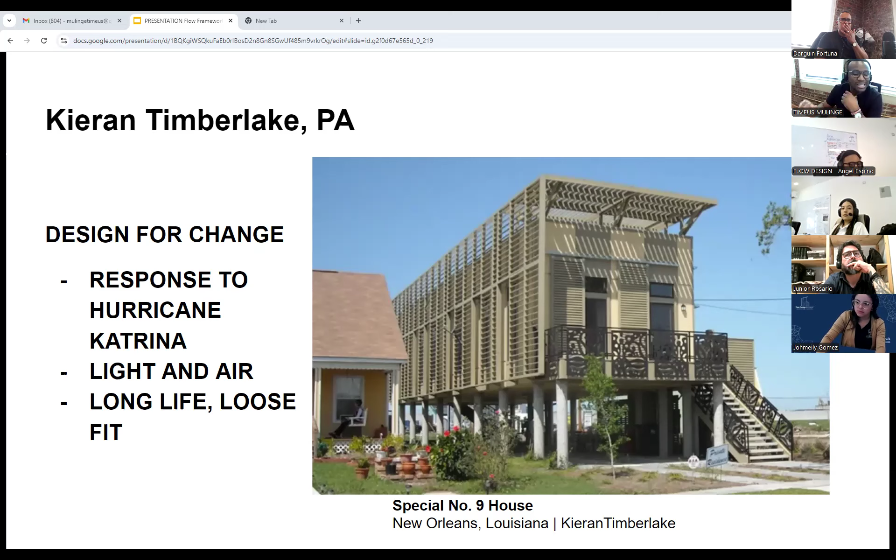This is a project that I used as a precedent, and I reached out to the partners and worked with them for my senior thesis, which explored the spatial potential in informal settlements in the case of Kibera, Kenya, Kibera being one of the largest informal settlements in Africa.

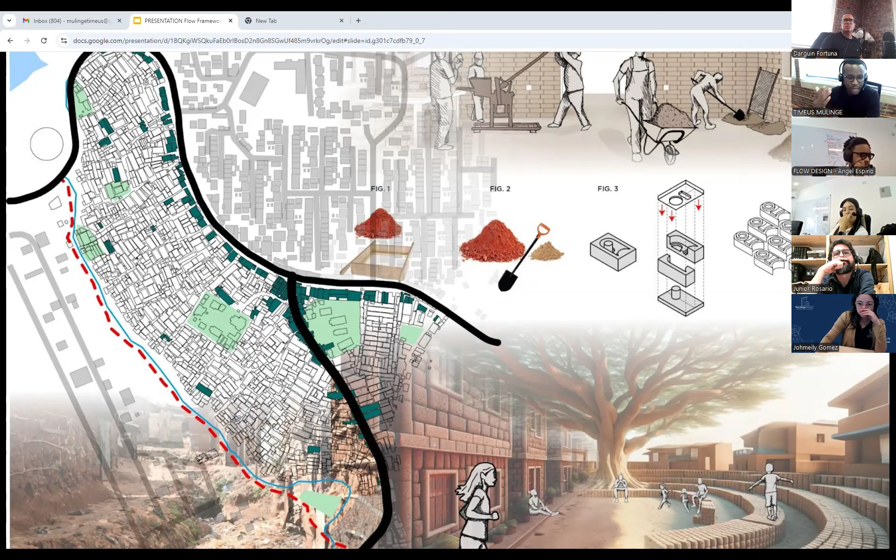For this project, I designed and obtained a provisional patent for a brick design which would become the fabric of the new community of the Kibera slums once it would be fully rehabilitated. The design of the interlocking bricks, using earth as the primary material, enables residents to build faster, cheaper, and better. The proposal tackled collaborative design with the residents, well-being, the economy and self-sustenance of the community, bridging social boundaries, and so much more.

As you can see from this GIF, this is the mold that would be used to create the bricks. When assembled, the brick wall is a structure in itself.

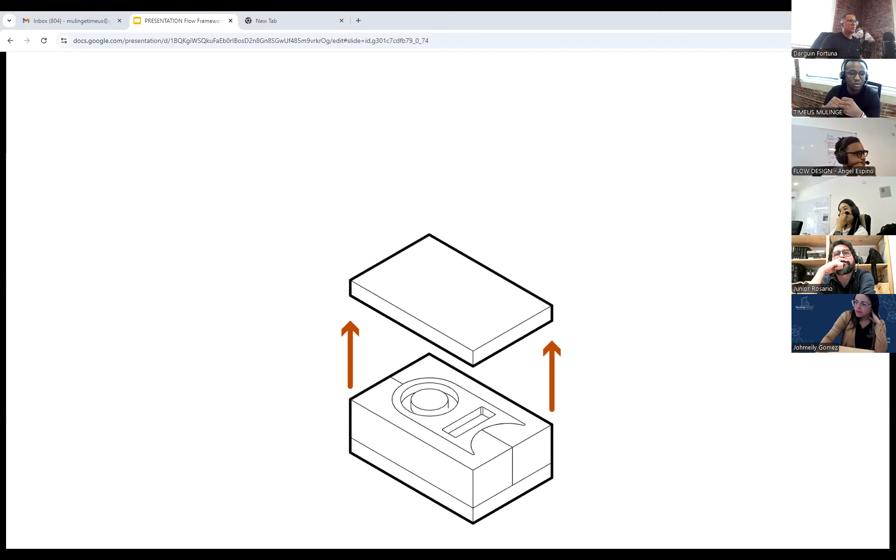However, its form allows for structural reinforcement through the openings if needed, and it's a mortar-free form of construction with a chase system built into the design of the brick that allows for the running of plumbing and wiring through the brick.

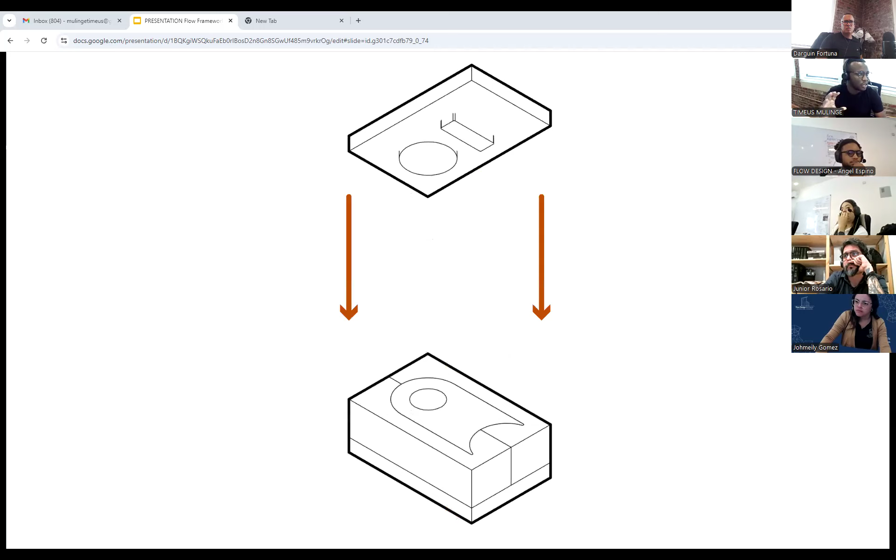This design functions better in equatorial spaces, for example in Kibera, Kenya, where you don't have issues of insulation, but the brick could also be modified to fit any other setting that you would expect it to fill.

The brick variations: the brick form is versatile and allows for a wide range of variations. One single mold can generate about 9 variations of the brick that facilitate different types of designs and movements, from staircases to Nubian domes to pavers and many more.

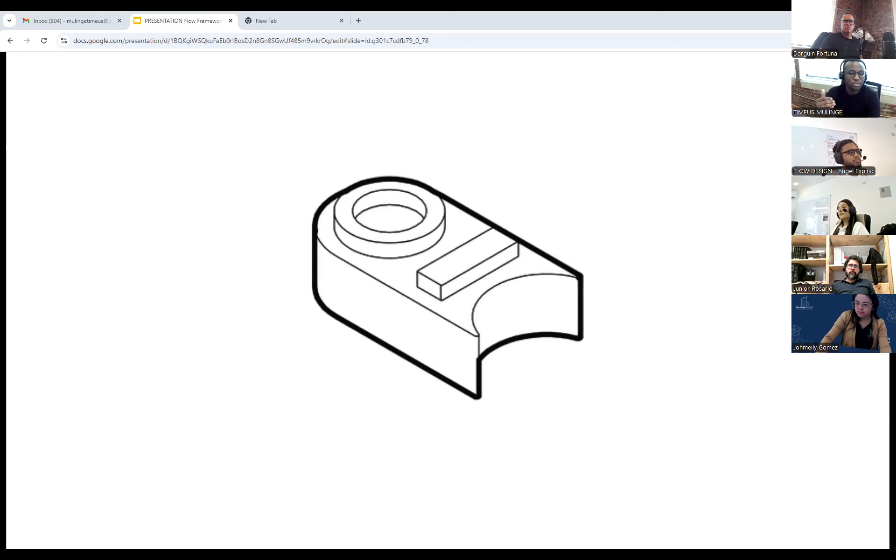At the larger village scale, the brick is used to build houses and spaces where collaboration takes place. The success of this project is tied back to the brick, a product, a transformative tool that becomes currency, reimagining the fabric of Kianda village, which was my test subject.

And it introduces spatial efficiency, breathability, enhances stability, productivity, and creativity, while empowering people to attain economical and familial prosperity.

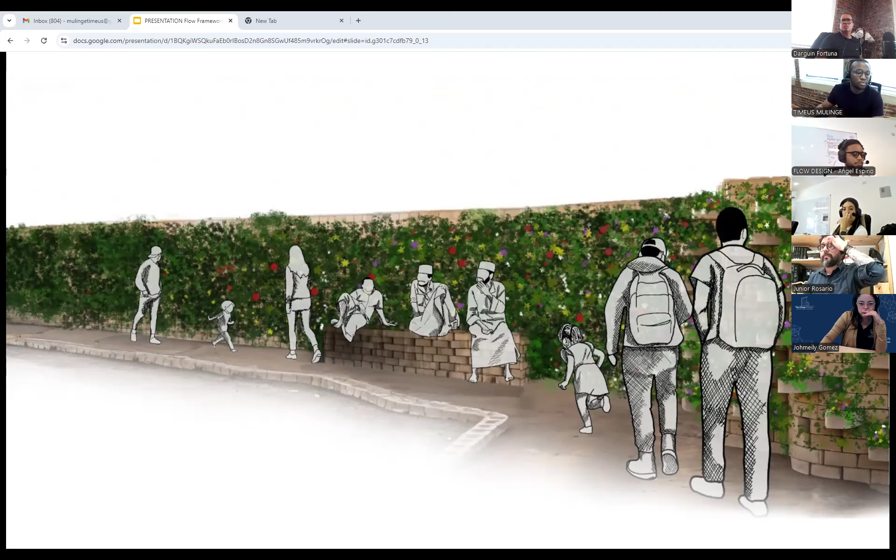This is one of the renderings from the housing methods that I did. The spaces that will be created will be used to open more educational spaces, create spaces for expression and creativity, which is a very common theme in the Kibera slums, and it will facilitate cultural and economic exchange.

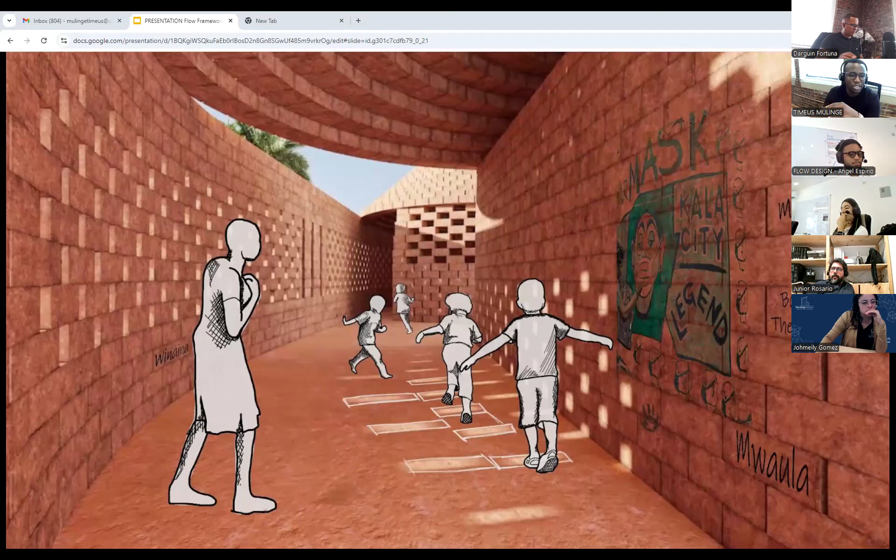This is another rendering. Currently, the senior thesis project is an ongoing conversation. The design is being perfected by a team of professors from Wentworth and professionals, and also some mentors. Implementation conversations are underway with a number of sponsors, leaders, and organizations back in Kenya.

The goal is for the patent of the brick eventually, and all other forms of ownership, to be transferred back to the people of Kianda upon completion.

By enabling active participation and giving them the tools, historical inequities stemming from colonialism are addressed. The brick assumes personal significance, becoming an emblem of legacy and ownership, which offers a direct pathway to self-determination, free from the cycle of colonization and westernization.

So I put this project here because it goes past architectural response and speaks into how architecture can be used to influence laws and create a system where we can design better communities in the disparities that are present.

Switching from that is a topic within my interest, which is design for equitable communities. As designers, creating and building equitable communities is essential in our work. The challenges around equity appear in both public and private sectors and require strategic approaches to tackle them.

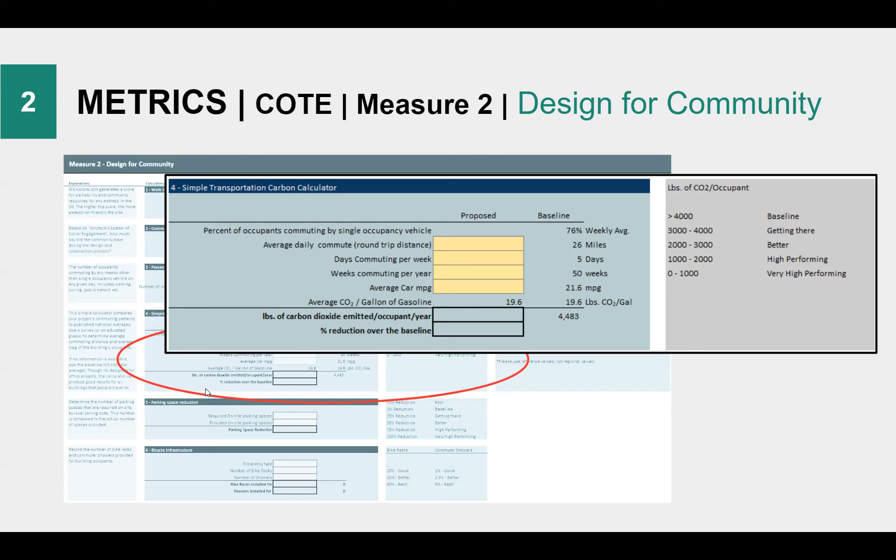It's us thinking about all of this so that every time I'm looking at a project at the very beginning - that's why we highlighted it in the contract - I look at it and say, oh, this person will probably need X, Y, and Z also. So when we do our design options, we do a basic one, and then another option that adds these things more intentionally. They talk about each one of these items and a metric for all of them in this presentation.

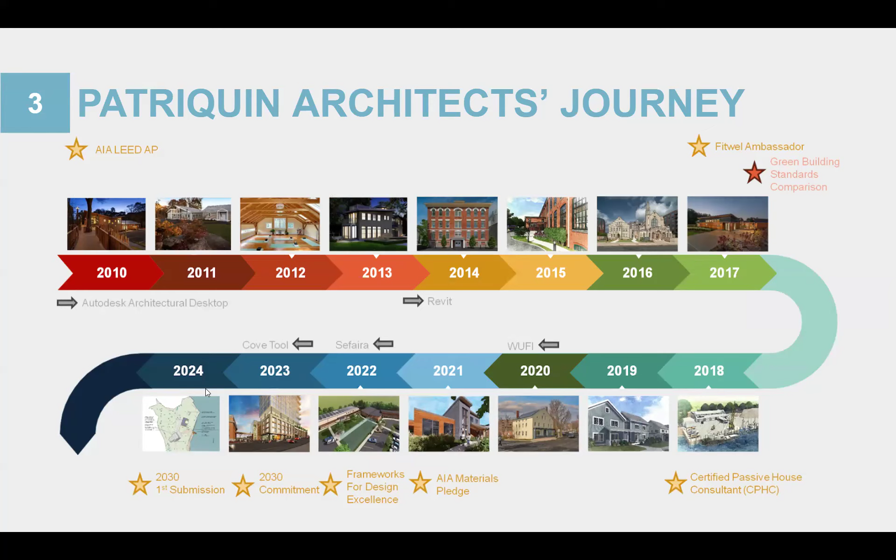Very simple, we don't have to go too crazy on all of them, just understand what they are, what they mean, what's discovery, what do they mean. In the presentation I shared the link to, this office talks about how they did it and the tools and software they use to do analysis. This one cares so much about just energy - this is energy plus net zero energy - but they talk to us about that.

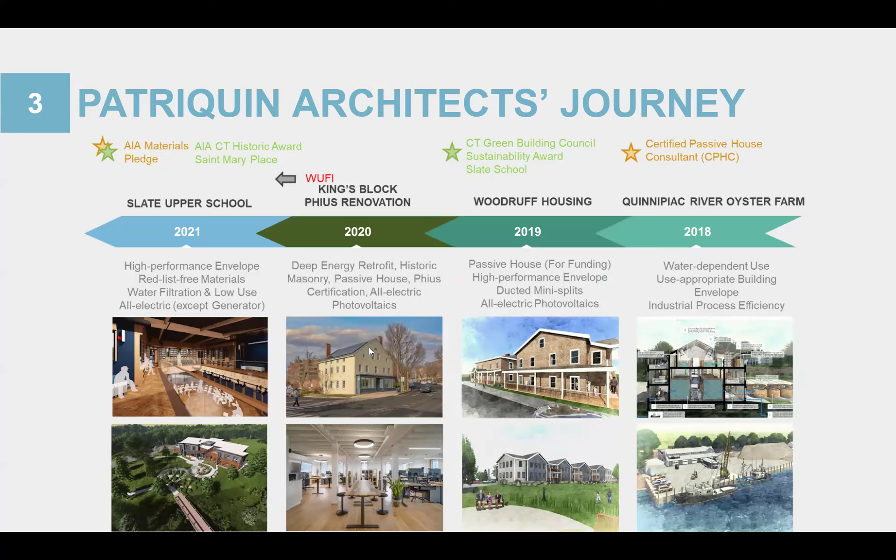So it would be good to look at it. These are all the different certifications that exist generally. They cost a whole lot of money, but a lot of people want certifiable buildings even though they don't certify, because they have to pay to be certified. But if you use the framework and the metrics, you end up with a more sustainable version of them. They did it with their own office. I really recommend people watch this presentation because it's kind of what Flow wants to do eventually - own our building, own our office, and test these concepts with our own buildings.

Pretty fun stuff, and we talk about the journey we're on right now - we're just starting it. There was this thing they mentioned at a jury I was part of - they said unless projects apply the framework, they won't get awards. And they were amazing, beautiful projects, but they didn't get awards.

No, I'm saying, and we are gunning for it. Exactly, so we are focusing on training everybody, and this is one of the trainings. So Nicole, can you show us what you did? Because we're testing this - we don't have a one-size-fits-all, we don't know what the process perfectly is going to be. But Nicole, can you share your screen and show us what you did?

Yeah, if you make me the host, I can.

I don't know if I can make you the host. You can actually present. Oh yeah, now I can. Yeah, go ahead.

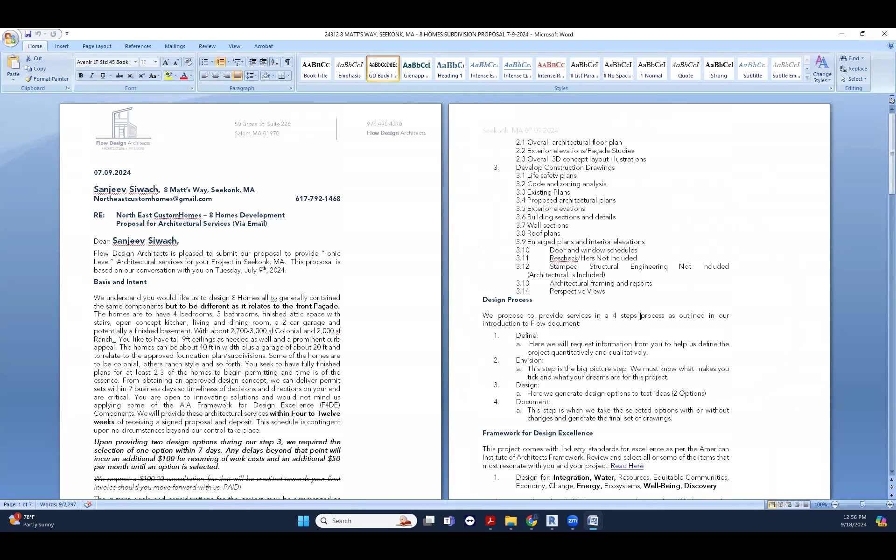And then did you look at the second page where it says the items highlighted in bold? The items highlighted in bold, framework for design excellence. So were those the ones you were looking at?

Yeah, I know there are like 10 of them, so I was trying to look for the ones that suit the purpose for this particular case. And I know Darwin already put something that he thought would be a good fit, so I based my research on that.

Then I went through the city and did my own survey. I realized it was a protected area. If you can see here, this is the site, and what we have at the back is wetlands and all of that. So I thought it would be nice to do my own research into what we can do here.

I never did this before for an actual project, so I just wanted to look for things I could tell the client that would make sense for him to apply, and wouldn't just be a nice story. So after all my research and all of that, I just...

Hold on. So what you're saying is it's not you coming up with some beautiful rhetoric that the AI told you, but what out of all of this financially makes sense for this client, that he would want to do because it makes sense financially anyways, right? It's the right thing to do anyways. Is that what you're trying to say? Yeah.

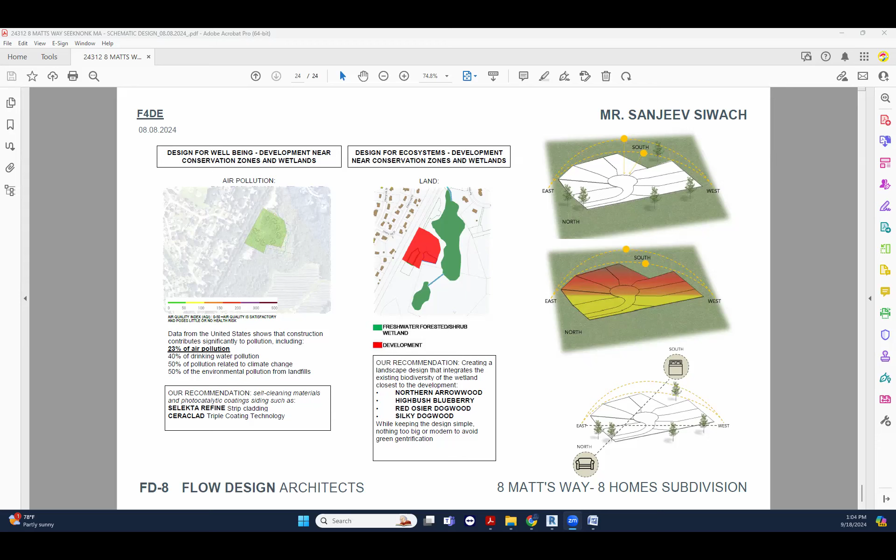All right, this is very good. I'm sorry that I put you on the spot, but I'm glad that you were able to put it right there and put it out. You've done excellent. This is nothing less than what I would expect to be done. It didn't take so much time, didn't take a lot of energy. It's something that you are generally passionate about. That's why we send the poll. If people weren't passionate about anything, they could let me know, and then it is what it is. But all of this is tied into, yes, we are more conscientious about what we're putting out there.

So when I mentioned that we are doing it, has everybody seen the new vision boards that we've been sharing? The new vision board is already predetermining and showing this right here. Which one of these are applicable to you as a client? Which one does the designer think is applicable to them? So Nicole pointed out these are the things that people picked: energy, economy, integration, resources, equitable. I care about energy and integration, but we as pioneers begin looking into those things, and we're going to be looking into trainings that align with those things, and we're going to give those trainings to you, paid by and brought to you by Flow Design, but also financed by the clients, because we're going to charge them for these things. So that was added into our handbook right now, and the goal is that we create a relationship with the materials rep, with the owner, with the contractor, and make sure that this thing is more intentional. It's not arbitrary, it's intentional. We've been sending an email to all of the reps. You guys haven't been seeing it, unfortunately, because we're feeding this little by little to you. But Nicole, you've seen it, the emails to the reps, and we already got some materials rep reply, right?

Yes, with a list of materials and why they believe they are sustainable. They want to sell these materials. So we're going to look at their numbers and see if they make sense quickly, but we don't have to do a whole lot of work. It shouldn't be too much work. And I think this presentation is a good fit.